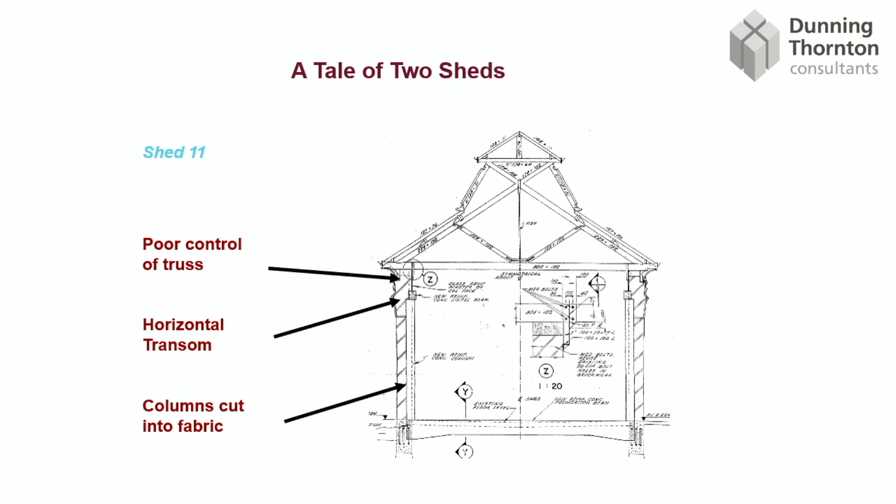And there were some sort of straps put on, but what we found out later, the building was still earthquake prone. It had some problems at the height of where it was joined at the roof, which we've seen in Christchurch is very important. The connection between the walls and the roof is very important. It wasn't a very good project as a precedent, so we decided, okay, well, let's start again.

And when we got to Shed 13, it's a pretty amazing building. It's very structural, it's very heavy. And what Ian said to me at the beginning, he said, like, you walk in, and this is the completed building before everybody moved in. You walk in and you look up at the roof, it's a bit like this building. And, excuse me.

What we engineers tend to like to do is put frames in buildings. And my first reaction to this building was to put frames in the building. And then I thought about that and I reflected on what Ian had told me, which is that you come and you look up. And so if we're putting these new structures across, we're fighting about the direction. So the inspiration was to turn our thinking upside down.

So instead of putting the frame up this way, we turned it up and did all the work in the foundations. And so we put large beams under the floor, and then we cantilevered these columns up, but we didn't put them in the brick. So we put them in separately. We made them out of prestressed concrete, so that's concrete that's got wires that have been stretched and then let go, and so the concrete doesn't crack, it's very compressed, which makes it very stiff.

So it was my way of trying to put a structure in it that was as close as I could get to mimicking the stiffness of the old brick walls. What we did to the brick walls was we post-tensioned them as well, so we cored holes all the way down into the foundations, and we put cables in which we grouted into the foundation and then stretched and clamped them down on top of the brick.

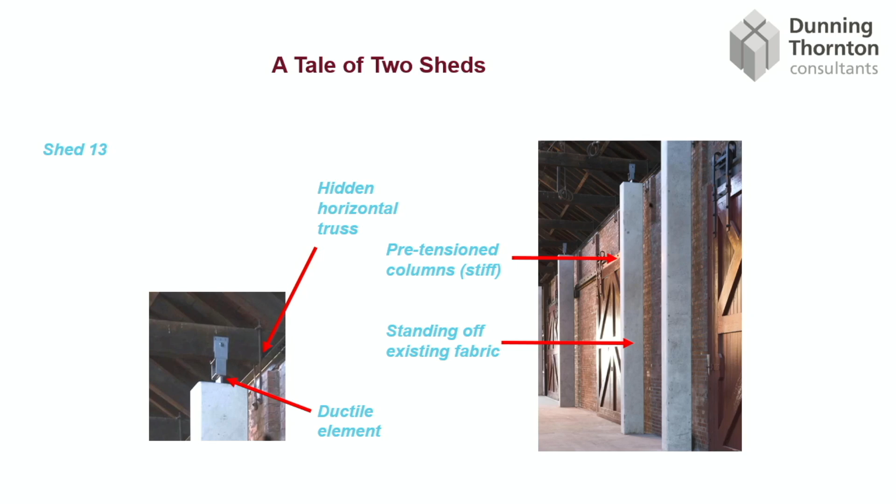So what we needed to do is absorb that earthquake energy, slow it down like the shock absorbers do on your car. It's not just springs, it's the shock absorbers too. So what we were trying to do is let the building rock like it wanted to, make it a bit stronger by post-tensioning it, and then absorb a bit of earthquake energy. So a lot of things going on technically.

But where I think this project came very well together was using the ICOMOS Principles, which is to make what you do as a structural engineer transparent and reversible. So we were putting these new columns that weren't touching the existing. It was obvious what was old and new, and if we find magic ways of strengthening these buildings in decades or generations to come, these could be removed from the building.

So I'm not sure if things need to be removed, but the concept that they could be helps you as an engineer pull them apart and make the legibility between the two items work. So to do that, we had to go up to Otaki and make these very strong, stiff columns in the precast concrete yard. So we were using cheap commercial technologies, if you like, but with a nice finish on the concrete.

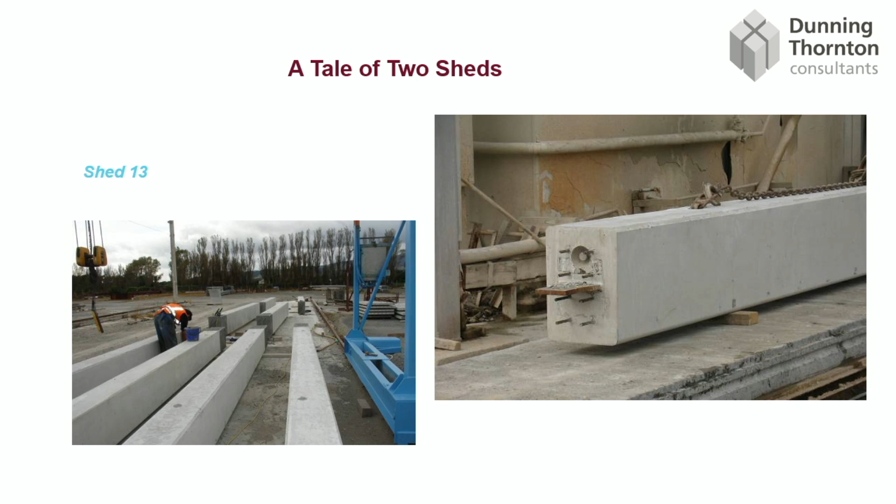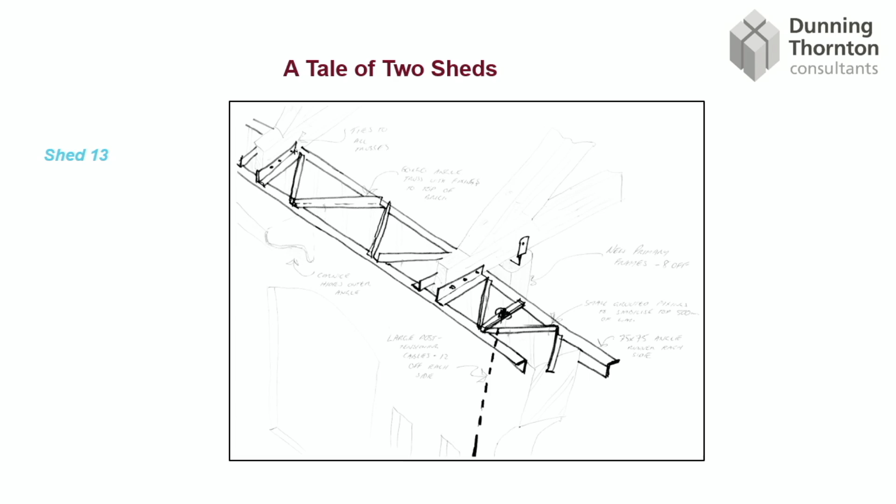Then in terms of hiding it, so we were showing it for the mullions, we then laced the top of the wall together with a steel truss. Because it's got very large cornices on the outside of the building, there was a gap between the cornice and the brick, so we were able to pass along bits of steel and angle and make a truss that capped off all the walls around the perimeter. This is a rough sketch I did in the design meeting trying to explain what I was trying to do. So you can see that running along the tops of the brick walls, there's just a bit of a steel angle.

So that's all laced up, and that means that the columns join up all the way along the walls, and it means that we didn't have to do anything to the roof. All we did is we re-nailed all the timber boards down. We didn't put new structure on the roof because we wanted to leave it in the state that it was, and putting this angle in the right place, finding that location, was a really big part of it.

So really, you can't actually get into this building, which is a bit disappointing because Mojo have it privately. But you can see where all of the interventions are spaced off the brickwork. It's very obvious what's new and what's old, and they're very different architectural gestures, if you like. So I think this is a particularly good job.

Just to reassure you, we then went back and addressed Shed 11 five or six years later, I think, and so we've ended up post-tensioning all that brick down and trying to make the existing strengthening work a bit like what we did here at Shed 13. So we've managed to strengthen that building too, and it's got a similar foyer intervention.

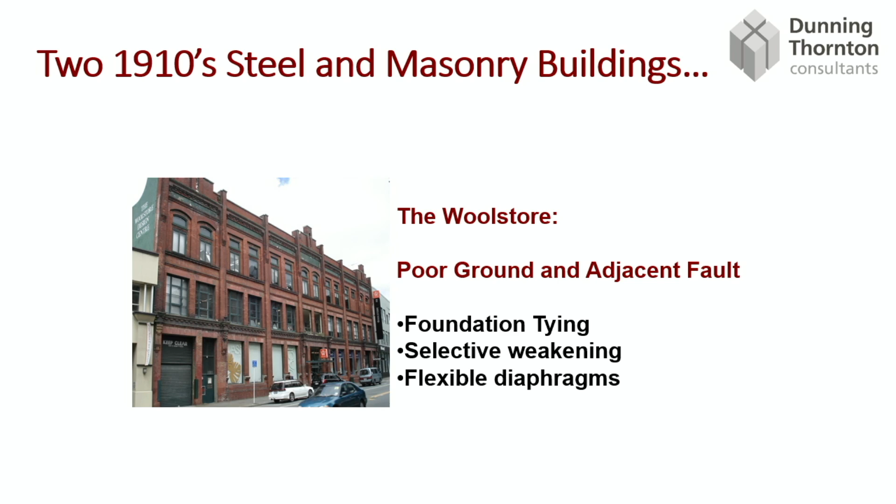Whereas the wool store, when you understand it structurally, is actually a very different building. It's an industrial building, made as a wool store, obviously, for very heavy wool bale loads. So it's a steel frame building, and even though it looks like masonry, the steel frame holds up the whole building and is then clad in masonry. So it looks like a brick building, but it's actually a steel building with a masonry cladding, and that's sort of good and bad because it's built in so strongly around the steel that they tend to fight each other a bit, and that makes it a bit difficult.

So what also made this project a bit difficult is the fault is literally right outside the front door. It's the scarp that comes down when you drive down out of Thorndon onto the quay. So we were really, really concerned about the foundations of this building and what was going on there.

And so what we tried to do with this building is embrace the steel frame, but then what we call selective weakening, which is some little delicate cuts to the masonry to let the building work like the steel frame it already has the strength from. Work with the building's natural strengths, if you like, and just with some small interventions free it up a bit. So I'll go into that in a bit more detail.

So we started, and the client was very brave. They tried to keep the building fully occupied throughout the strengthening, which was probably painful for some of you if you went to visit the shops, and it was a little bit difficult for the tenants. But what it meant is that there was still some life in the building, and it was occupied.

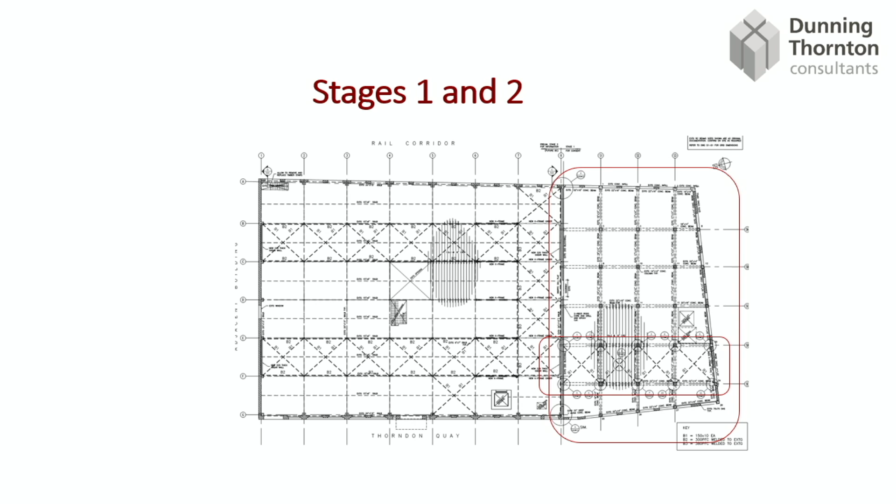And the addition had a concrete basement. In the original part, it just had very large caisson mass concrete footings, probably shoveled in by hand. And so we're really worried about how these would respond when the ground's all moving, with the fault moving and earthquakes and that sort of thing.

So what we did is we dug out the whole basement, we cast a big raft to join everything together, and then we piled and anchored the existing foundations down. So we created new rigid connections through the beach and into the alluvium underneath the old beach that the building was built on. We had some bracing inside the building because the masonry in the facades wasn't strong enough, but we put the bracing inside the building where you don't see it on the elevations.

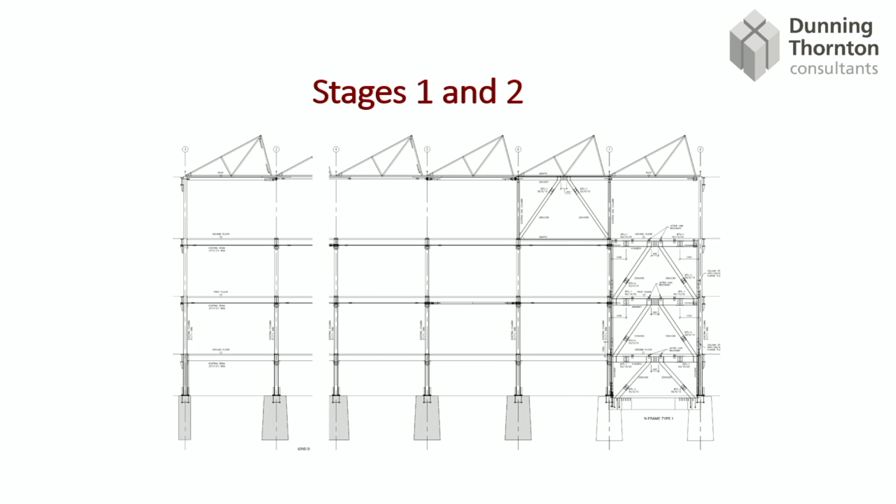So you can see it, there's some K-frames within the building, but you walk under them when you're inside, but the idea was that they were of the same sort of ilk as the existing steel frame. And then in the other direction, we had very stiff boundary walls.

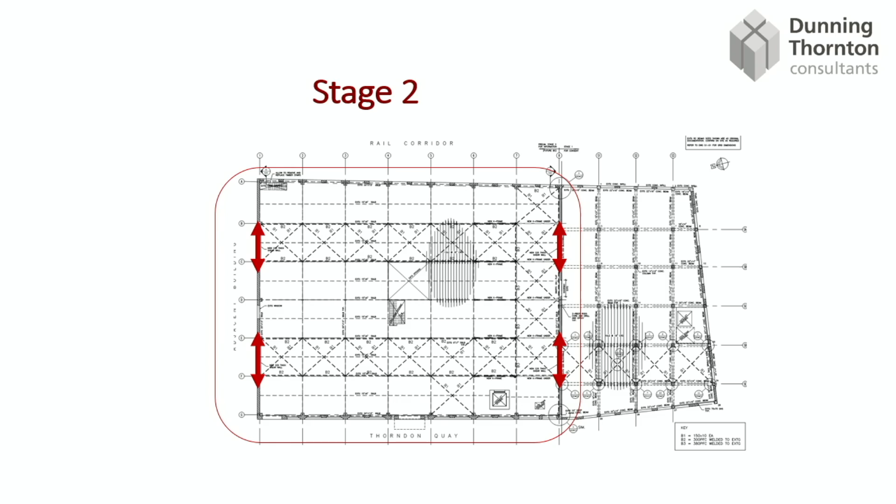And what was interesting about these is they were almost strong enough for the 70% of code that we were strengthening this building to. But what we were worried about is because they were so rigid that they would damage the foundations, because they're so strong that anything that the ground moves causes them to push and pull on the ground each side and potentially cause liquefaction.

So what we ended up doing is we ended up slicing these walls into 6 pieces, so that each piece could move, and so it was more flexible. So this is that selective weakening I'm talking about. So as engineers, we like to control things, so that was our way of getting control back off the building.

So we're slicing the building into pieces, and then we're connecting it up with a new piece of steel that we can measure, and so we know how strong that connection is. So now we know the performance of the building, because we've done something ourselves and we've kind of taken control of it.

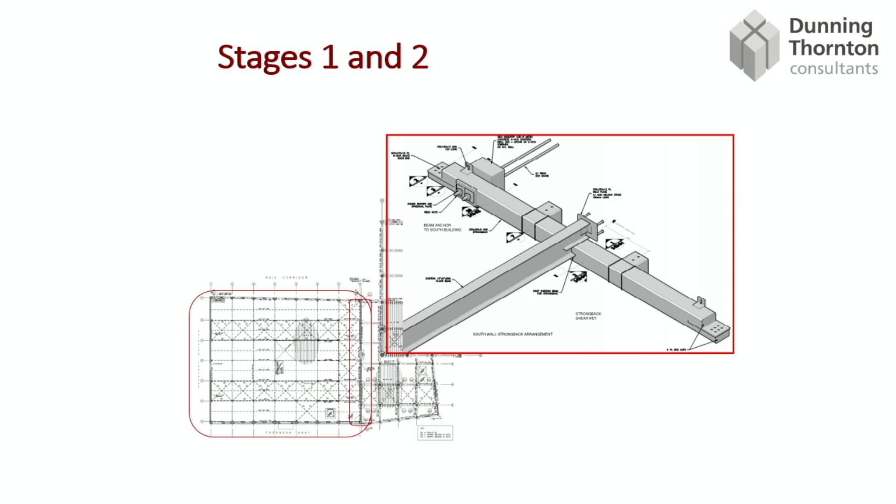And because it was built in 2 stages, we had to try and join these up. The grids didn't line up, and it was all a bit of a mess. So we had these very complicated bits of steel that had to try and hold one building to the next, and at least the floor levels line up, which doesn't always happen with these buildings, and kind of connect it through these panels of the building that were moving in earthquakes. So some really complicated bits of steel, as you can see, to make that happen.

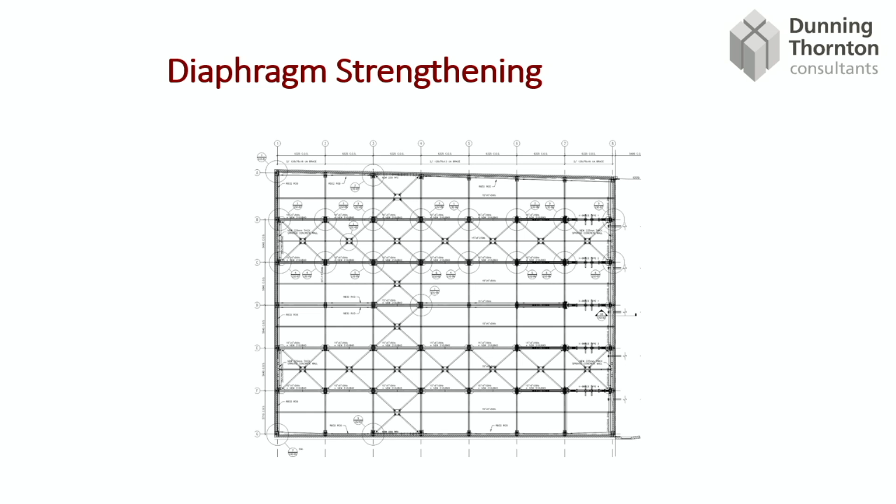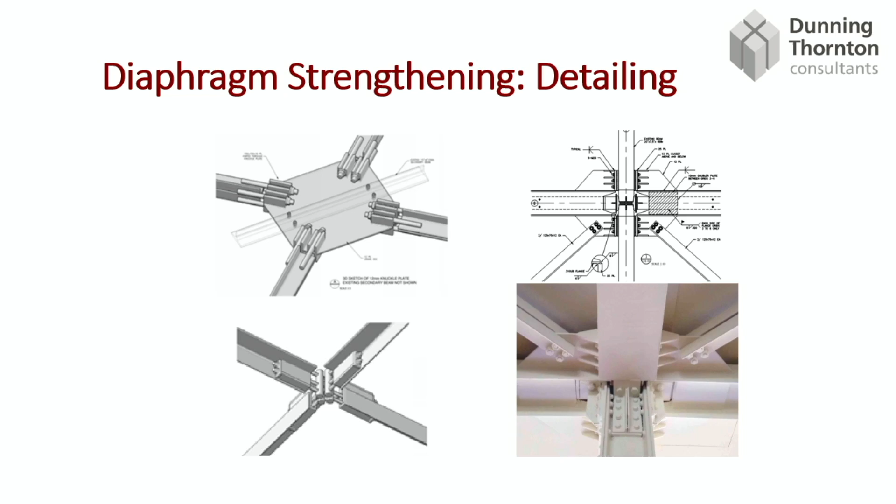So you get this crazy bit of structural modelling where you're trying to predict how the building works. But what it really came down to for us was, let's get a couple of good details that run around the whole building and get a bit of a theme going. So bracing up the floors, what we tried to do is pick up the language of the sort of Victorian detailing of the old steel frame, but it was different because it was new. So we didn't try and use old rivets or anything like that.

So we used new bolts, but we used lots of stiffeners and really engineer-driven details, which you see in the old railway stations and that sort of thing. So we tried to express this in the same way, where instead of just using a bigger bit of plate, we used more smaller bits of plate to try and show how the engineering was happening, and therefore make them more in keeping with the existing building.

And we've had some comments from people looking around saying it's quite in keeping, and I think that's important, that you don't try and mimic exactly what was in the old building, but you do something of the same vibe, the same theme as the original.

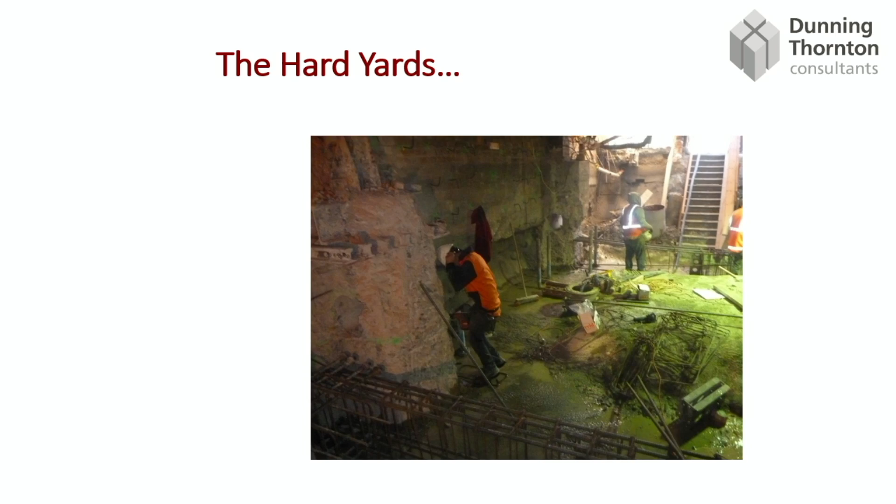Something that always happens in these jobs. This is the blunt end of structural strengthening: digging in under buildings, horrible, hot, wet work, digging around trying to strengthen these foundations. I don't think people quite appreciate the work that's done by some of the contractors to get in and under these buildings to try and make this happen. It's noisy work. It's difficult, but it's essential, and it's often the place where we do the most work to make sure everything's tied together.

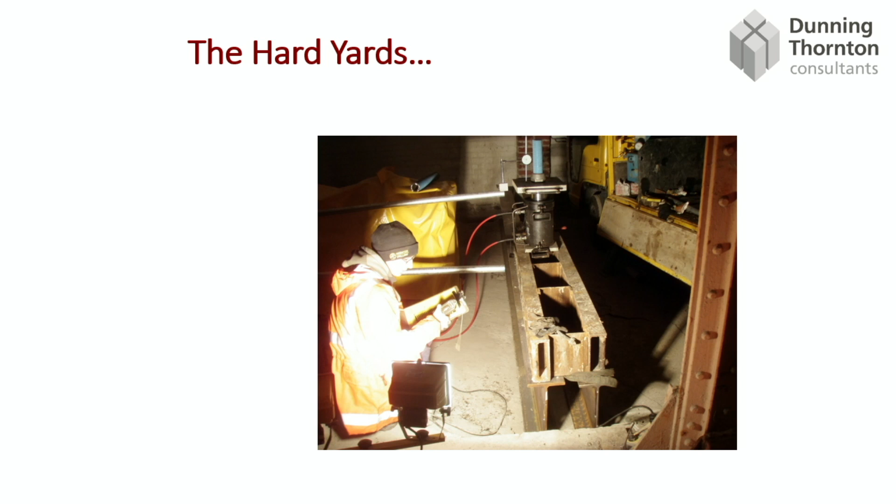And there's lots of metaphors throughout history and religion about having a good foundation. So an important part of the job. Testing the anchors, testing the new connections we made through the beach into the alluvium underneath. Connecting everything up, lots of reinforcing, connecting to the steel frame, both new and old, above.

It's more craftsperson like. That's why it's expensive, unfortunately. But you're trying to match something and mate it up to the existing. And an old building's always got different measurements, and it's always moved a bit. So it's difficult. And one of the achievements was keeping, some of you might have met the cafe owner in the wool store, and she's a very strong personality, and keeping her happy throughout the project was an important project goal.

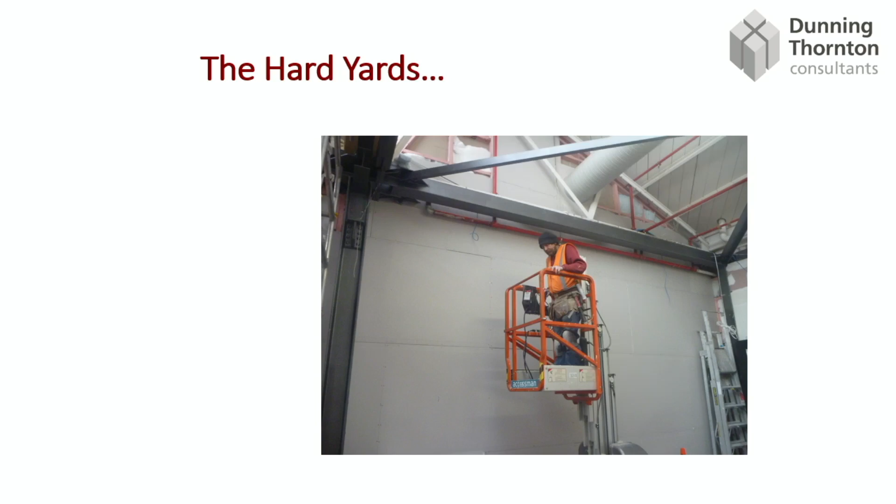So for the wool store, you can see here there's new bracing, but you're seeing the old behind it. Again, it's a little bit like Shed 13. So you're seeing old and new, but the new has some ilk of the original design in it. So that's our way of trying to make it not fight it when you walk around the building.

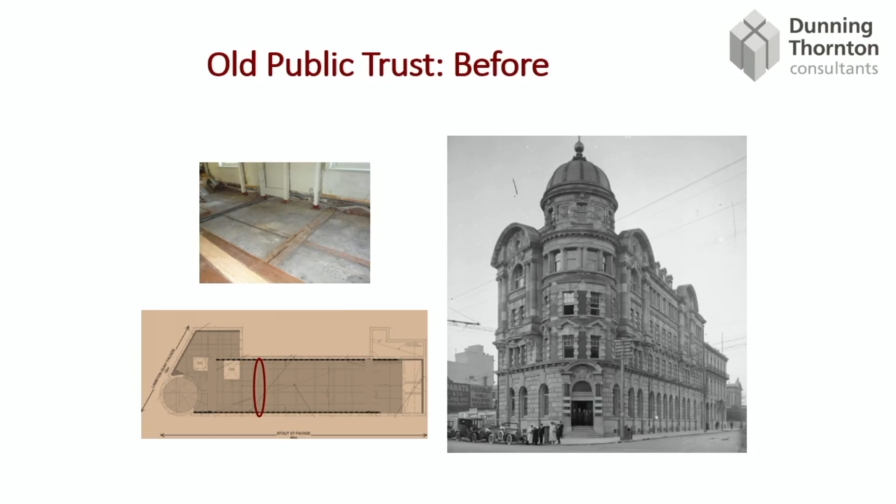So in contrast, the old Public Trust, instead of a steel frame, we've got this masonry frame, but you can see in the photo on the left, those are the girders that hold up the floor. Now, we had a summer student from the architecture school work for us, and she did some research into the history of this building. And what she came up with was that after the earthquakes that Wellington felt, including 42, there were quite a few between when the building was built in 1912 and 1942.

They thought beams were falling off the building when it was shaken by these earthquakes. What was happening is these old girders had plaster around them, and the floors were just cast on each side, and as they moved, they were making bits of plaster drop down. So people thought the beams were falling on their heads. That's what was reported in the paper, but it was actually the connection of the floors each side of the beams that was the problem. This very long building was bananaing in the middle in these earthquakes and breaking all the plaster. So that was a big challenge for us to fix.

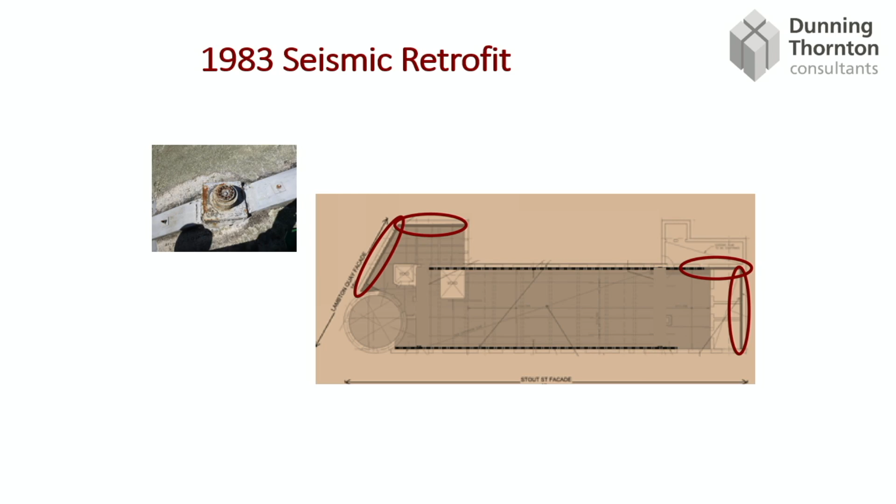In 1983, they realised that the building was not strong, and so they did what was then seen to be the right way of doing seismic strengthening. So they did what we did in Shed 13. They cored down through some of these big pediments and pre-stressed them down, so they did a really good job of clamping that together. And they cast some shear walls where I put the bubbles on there, to try and brace the building along and across.

What we did in the 80s and 90s, and it's even gone on for some other engineers, is rather than work with the existing building, it's like, well, to do my engineering calcs, I can put a new building inside it, and then I'll connect the old building to it. That was often the way it was done in engineering circles, and it's not seen as good practice now. What we try and do is understand the existing building.

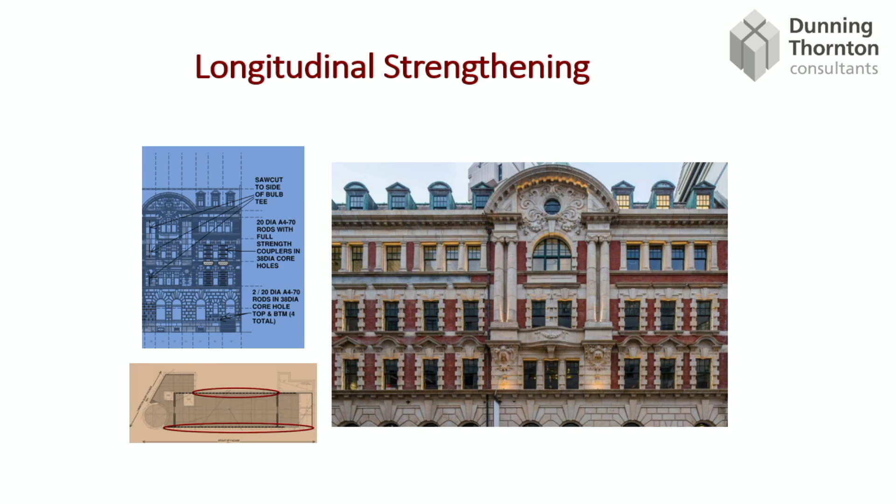And what we did by studying this facade, we used this as part of, in 2014, we issued new guidelines to New Zealand engineers on how to strengthen masonry buildings and how to do all the calculations, and we drew on the research that had been done in North America and Italy especially, to try and improve, especially after Christchurch, how we engineers understand how the masonry is naturally strong.

And what we found with Old Public Trust is the piers and the spandrels of these long facades, the main facades that run along Stout Street, back and front, is that they could almost take the full code loadings, because the piers would rock and then they would come back on themselves, and there was no diagonal cracking. They were very predictable movements in the facade, and so we had this great building that had a lot of strength longitudinally, which didn't really need the shear walls that were added in the 80s, but it still had this

problem across the building. On these facades, some of the piers are really big, and so we did some discrete cuts to make the big pier two smaller piers so that all the piers were even, so that the building all moved in a more uniform way. And we were pretty delicate at that, and you can't even see them from the outside, these extra cuts. They're within the masonry. And then when they redid the mortar joints, we dug out the mortar and we put stainless steel rods in there, so that helps reinforce it so that there's no sliding off of the piers on those joints. So again, really using the strength that's already there.

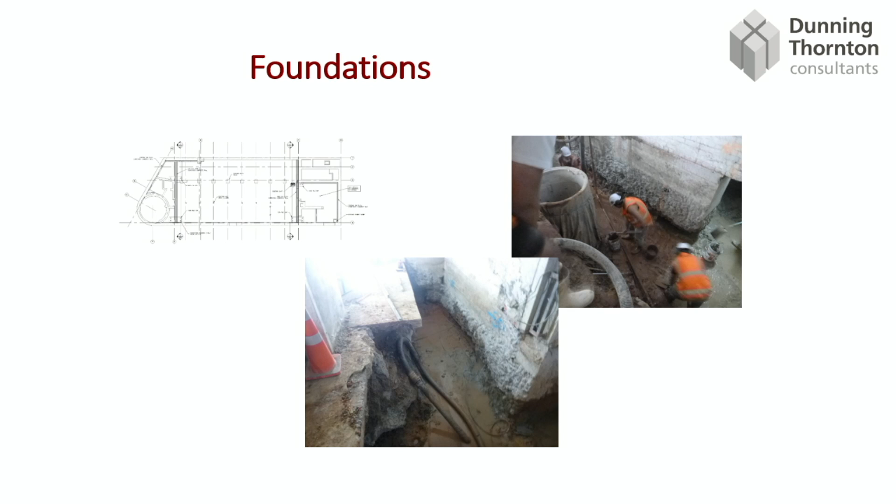Foundations, we've talked about this before, so try and anchor the building down to the good rock that was underneath this. And then across the building, we decided, well, we just needed to do something really, really strong, but doing things that are just strong in an earthquake isn't good enough, because we never know. Every earthquake surprises us. When we have a new earthquake, us engineers learn something. So if you pick a level of strength, the next earthquake could always be stronger. So what we try and do is absorb the earthquake energy, like I said on Shed 13. So we call this ductility.

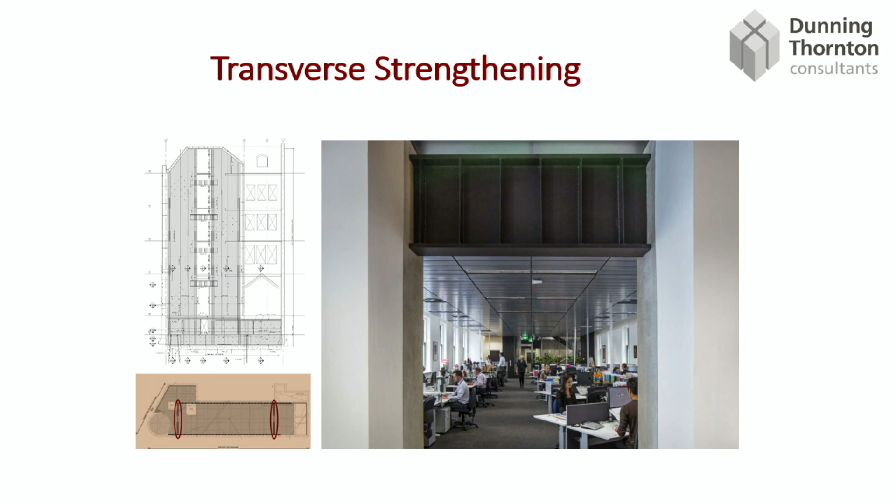So what we did, instead of just making one big rigid shear wall with doorways in it, we made a slot in the shear wall. And this is where you walk through out of the main entrance into the floor plates you can see there in the photo. And that's coupled up by steel beams. So instead of the shear walls being all rigid, what they can do is move, and the steel beam gets bent by the earthquake. And the steel is very ductile. It can go backwards and forwards in the earthquake and use up the earthquake energy. So again, reaching out, trying to get some control over how the building's going to work, but it's still very stiff because you've got these massive walls that are talking to each other through the steel beams.

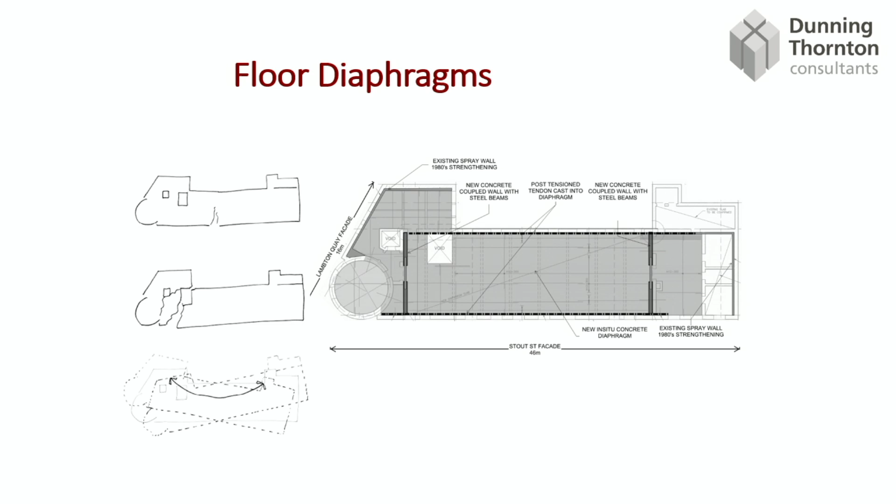So I didn't publish these sketches to the client, who was quite nervous about the building at the time, but the big problem was that the building was twisting around and tearing at its floors. So we had these old steel beams that were in the floors and that we could see at the top, and they were underneath a raised wooden floor.

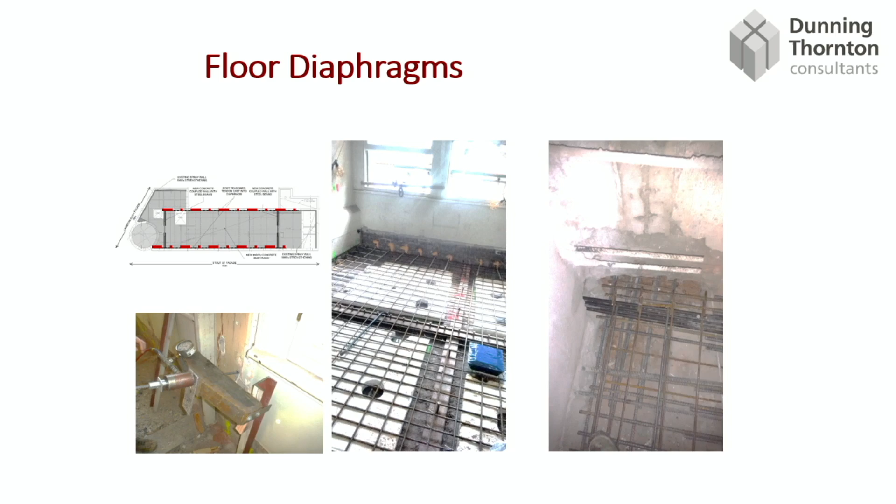Now, Maurice Clark owns this building, and he was doing the strengthening, and he and I had many discussions about what we should do about these floors, because there were some really nice old floorboards within the building, and that sat over the top of this concrete floor in the steel beams, and Maurice was very much like, well, we've got to put the wooden floor back, and I said, yeah, but the problem with that is we need to put all this bracing in, so where do we put it?

Do we put it underneath where you're going to see it if you look up? Could we pull up the wooden floor and put it down and then put the wooden floor back? But then once we investigated the building, we found that in the 80s, when it had been refit, there was only about 5% of the wooden floor left. Most of it had been taken up, reused somewhere else, and there was particle board everywhere. So that shortened the argument quite a lot.

So we basically pulled up all the wooden floors, and we used that thickness of the old wooden floor to recast concrete. Now, we normally don't put that much concrete in an old building because we're making it heavier, we're making it worse, but we'd done our studies in the long direction, we knew we had extra strength in that direction. And what it also would do would make the old steel beams sag.

So what we did is we propped those beams up, and we put things like bolts that are welded to the steel beams. And when we recast the concrete and then depropped, the beams would act with the concrete together. So we made the beams stronger by making this connection to the new floor diaphragm that we'd put in. So by these new strips of concrete, we were able to connect our shear walls and tie everything in very well.

And on the outside, to make this concrete stiff enough, we also used some cables, some post-tensioning again, because we want to stop the concrete from cracking, because cracked concrete can be like 4 times as flexible as uncracked concrete. So we wanted to squeeze it up and keep it stiff so that it worked with the old masonry.

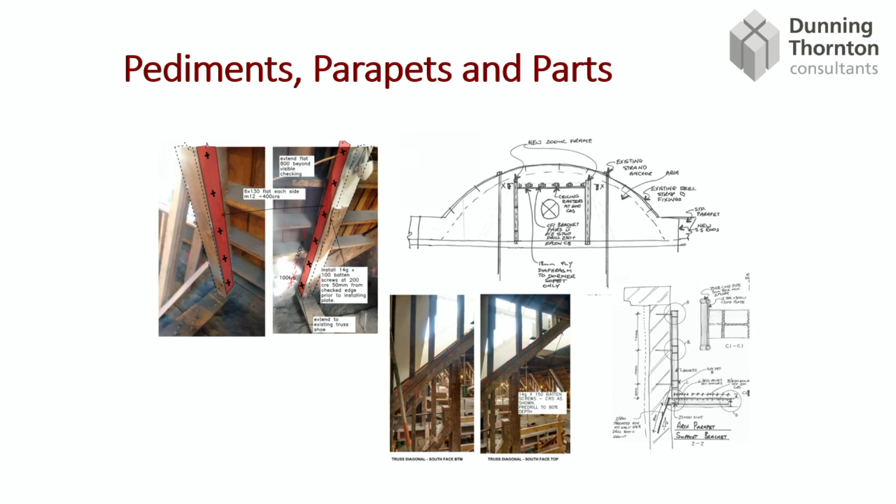We did further strengthening to the parapets because under the new codes, the loads were higher than they used in the 80s, connected in all the really difficult parts around these mansard roofs and stuff, and we see really often with the heritage buildings, it's the little bits that are the tricky bits, and they take these sort of sketches that we do. Some of my staff who really love doing this kind of work, they end up with dozens of these sketches at the end, trying to communicate to the contractor how to fit something in there.

It contrasts so differently from when you draw something new, and now you can just model it in 3D and draw up all your joints in full 3D. It doesn't really work with an existing building because you don't know where things are until you actually open it up, and it can be like 3/4 of the way through the construction project before you can even see what you're really dealing with, and so you've got to react very quickly and then try and keep knitting it all together.

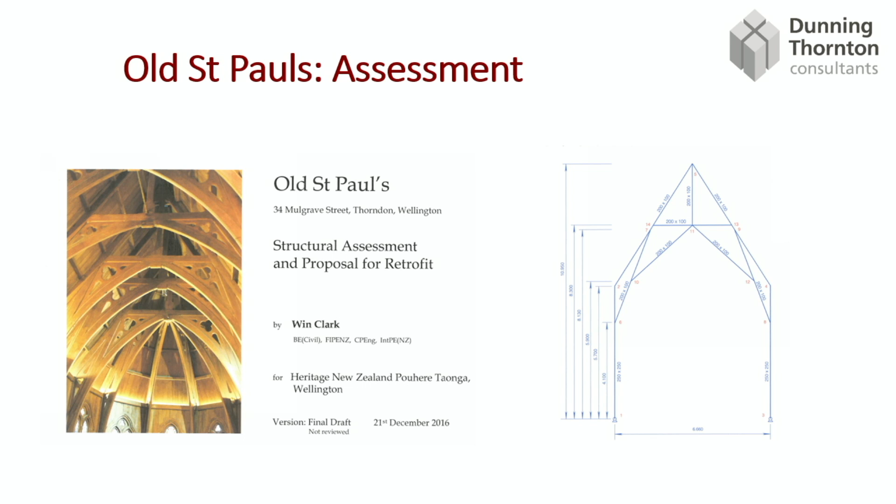Right, so going from masonry to something a bit lighter. Old St Paul's. We got involved; Win Clark, who's done the assessment on this building, very passionate about heritage, had done some assessment on Old St Paul's, and this is one of his models from his report that he'd finished just at the end of 2016, just when the Kaikoura earthquake happened.

And he was saying the building naturally has a lot of strength, but part of the thing with the old timber details is that they were mostly mortise and tenon, and so they were notched in, and so the building was potentially very strong, but what would happen is these tongues that were slotted into the wood would withdraw in the earthquakes, and so that loosening was possibly compromising the strength.

So the building had an ability to be strengthened to 90% of code with the structure that was there, but all the connections weren't up to that, and so he needed an engineer to go through and work out how to strengthen all these connections, and that was the job we took up. But then Kaikoura happened, and those of you who went into the church after the earthquake, you might have noticed a whole lot of truck straps around holding the building together.

I was actually supposed to be off on holiday with my family, and I ended up staying another 2 days to do this strapping design, and then I flew up and joined them later for I think it was Christmas that time.

So what we did is we bound it together with straps, and that's why the building, by keeping these joints shut, still had all the strength. But then the job was how to do that in a permanent fashion.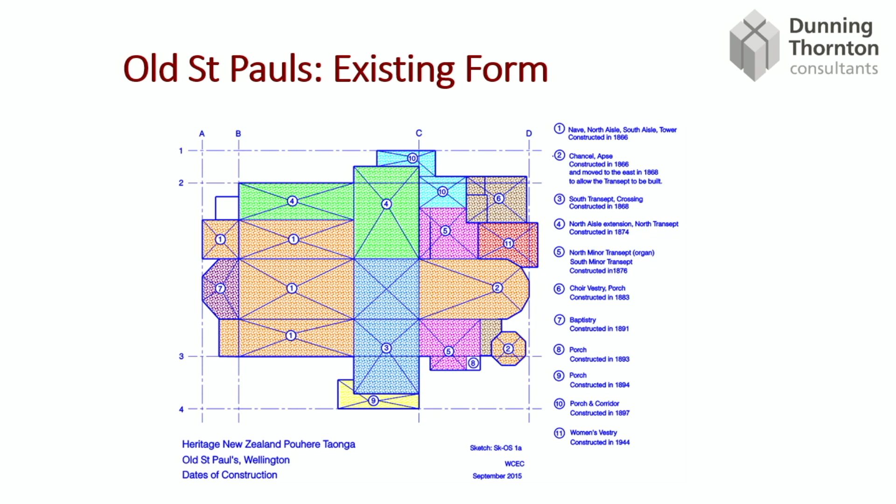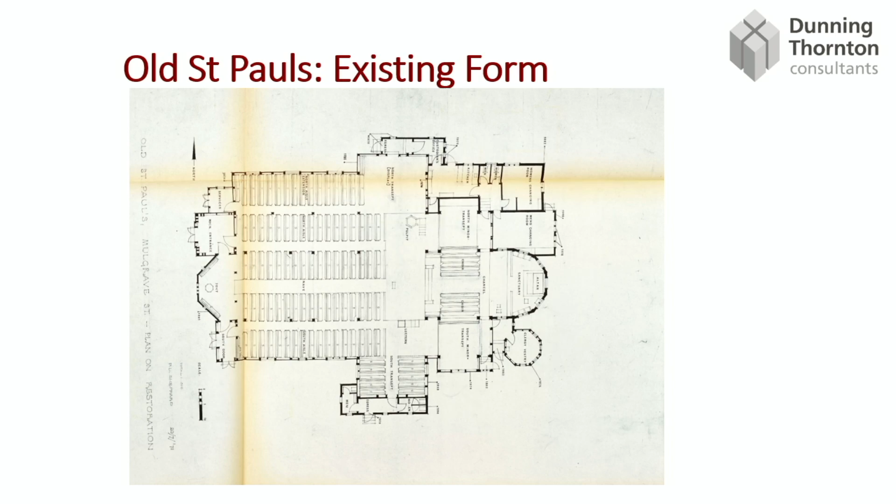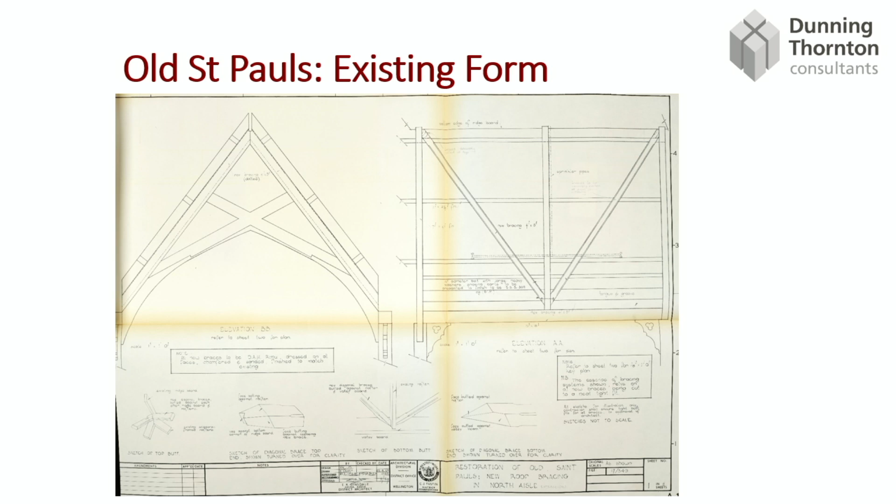So they were trying to put back all the braces that were there. Because there's quite a few diagonals in the building, they were assuming that they were all good enough, and there were these great drawings where they're dimensioning how they have to notch the end of each brace and fit it in and do all the sort of stuff that you have to do with these wooden buildings to fit them together.

And then what became slightly the bane of our life were the transepts of the building, where they had these timber frames where they'd put different braces in, but because they were such an amalgamation of different years, nothing really lined up. The northwestern wall at the end of the transept that faces the Tinakori Hill had been moving around quite a lot. So they almost rebuilt that, but they rebuilt it in the old form, and they just added a couple of diagonal braces to stop it moving around.

And that was actually the worst thing for us, because what we're trying to do when we strengthen this building is to hold the joints shut but not stiffen the building up, because what keeps this building strong is the fact that it can be flexible. It's timber, it can move, and all the joints squeak, and that squeaking of timber sounds facetious, but that's using up the earthquake energy. We just have to have that little bit of give, all that little friction spread out through the building. That's what makes it strong. So we've got to not make it worse by over stiffening the building.

So that's quite a challenge for us, because you're talking about how old materials work, and the calculations are plus or minus 2 or 3 times, not the kind of 10% accuracy we're used to, and so you've got to get your head around that.

So the concept was to tie the main frames across the building. There was a lot of discussion with Russell Murray, who was the heritage architect on this. We had the truss ties across while it was being used after Kaikoura, and there was a question, could they be removed again, so that when you looked down, there wasn't any new structure across there. And we looked at it, and it's like, no, this building will always get wider when it shakes if we don't have that ability to tie it.

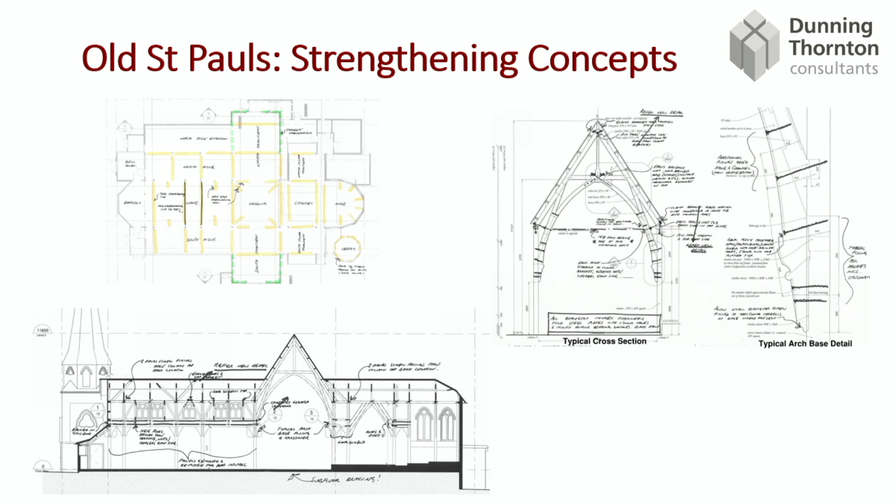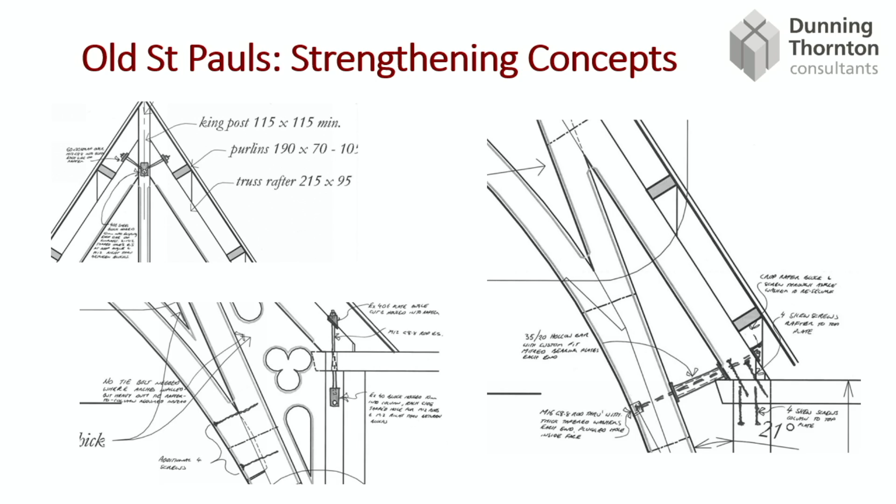So the concept was, in the old timber, we didn't want to tighten it too much, so we put blocks in that were let into the wood, and we put clamps in, but they weren't too tight, and so we're notching and we're pinning and we're using screws. Now, these aren't the screws that you're normally used to that are about this long. These are screws that are this long, and they're up to 10 millimetres diameter, and they're made in Germany or Austria, and they're very high tech.

They cost about 100 times what the little screw does, but these are the new tools that we have. And by looking at where the thread is on the screw, having sometimes gaps in the thread, and looking how much you squeeze the joint before you put the screw in, that's where we can start to get this control over letting the joints be flexible but strong.

And so what we're trying to do is this kind of, you can see the sort of blocks that were hidden in behind and then bolted, then clamped through, so that you're trying to think of the builder trying to reach in and fit it, and you're also trying to think of, when you're looking up at it, how is it going to look visually.

Continuing my foundations theme, this is a bit more like people are used to under their houses. We had to go and brace the subfloor, so it's the same as you see braces under your timber houses, except that they're about 2 or 3 times as big, and so we went through and did that everywhere. Bit difficult because there was a whole lot of asbestos lagging from previous services there, so that all had to be cleaned out before we could even go under there to inspect it all.

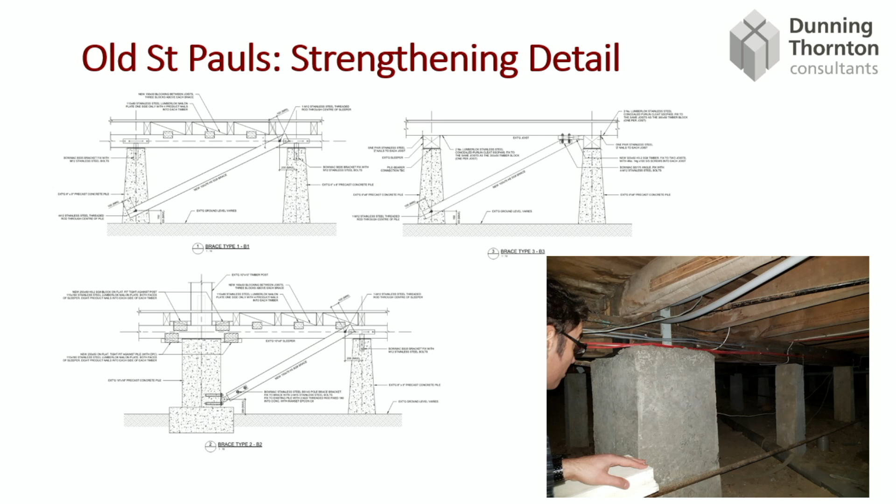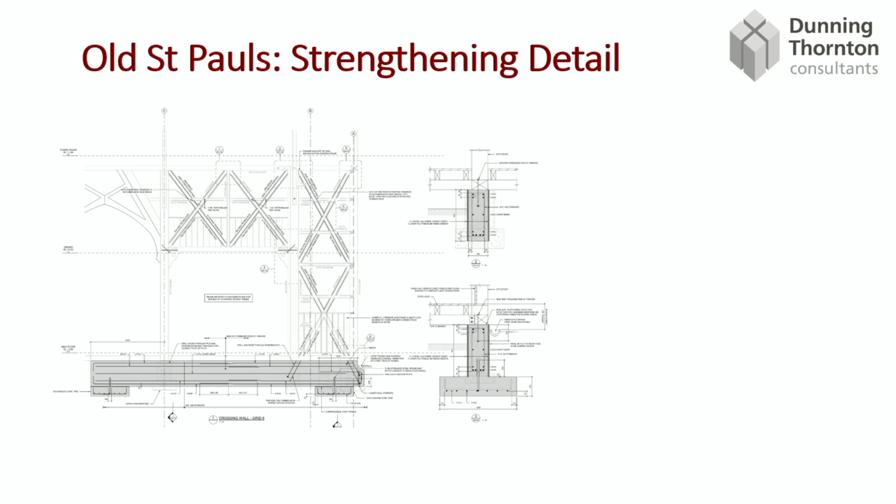We put new foundations under the transept, so what we decided is we would make the wood move a bit, but if the wood ever got overloaded, we put in a foundation beam that was only just heavy enough so that if the earthquake was bigger than we expected, the building would lift the foundation beam.

So therefore we're getting that control back, so that instead of the wood upstairs breaking, it would always lift the beam. So there's a little bit of control for us there, in case the shaking was ever bigger than we predicted. So we created these sort of pads underneath the footings and a beam that sat on top so that it could rock around.

And then with the braces, we're running rods. You might have gone and looked at these up close in the last couple of years, so we ran rods in parallel to the timbers, but we ran it about halfway across the wood. So when you look at the timber, you're still seeing the edges of it, but there's a rod sitting there just off it.

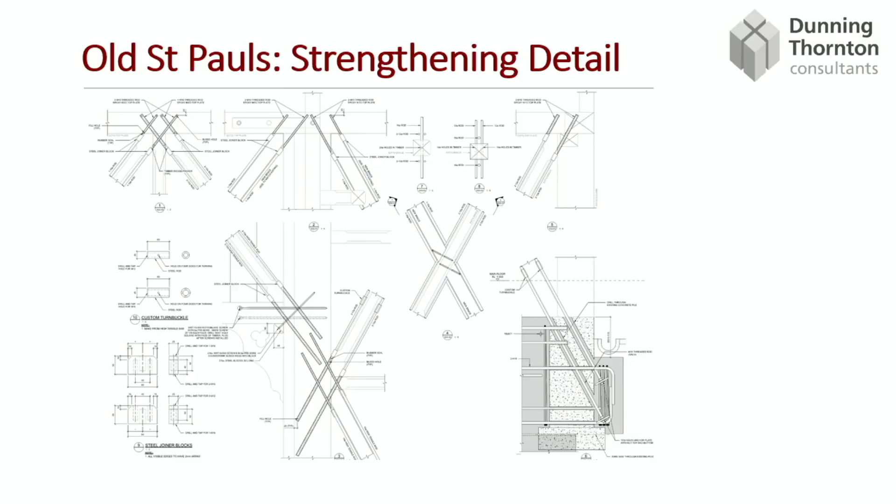And so those rods are only there finger tight. Some of them have epoxy fixings, some of them have fancy screw fixings at the end, but they can stretch a little bit. So again, letting the joints open and have a bit of give to the steel. So the building still tries to move how it always did, but then is caught by this reinforcement we've added.

And then a lot of these panels were then taken off on site, and nothing ever lined up. It was worse than we thought, and poor old Matt from our office, changing details, reworking how we could route stuff up, putting wedges in to line things up, and Tim from Maycroft, who sadly passed away about a year after this was finished.

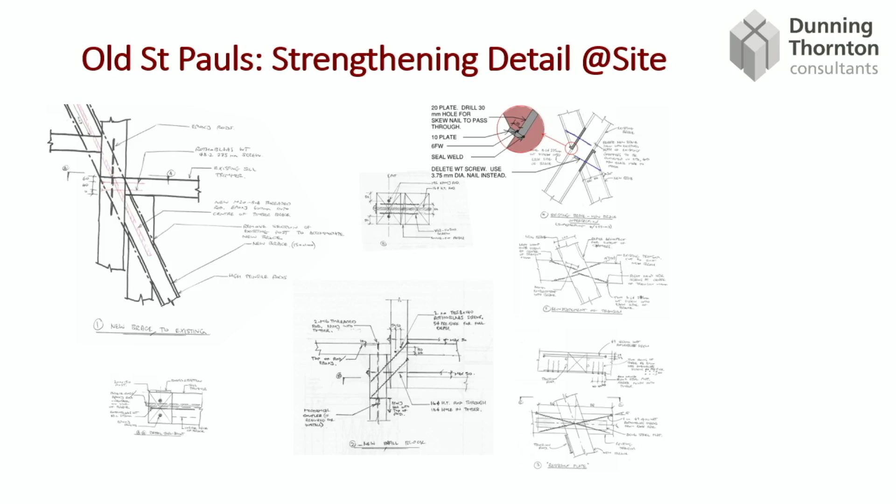These guys were so into the carpentry. They had young apprentices who were learning this stuff, and on this building you had to think 3 times and then only put 1 screw in instead of just working hard. Once they got the bug of that, they were loving it, because of the beautiful old timbers, all beautifully seasoned, and the vibe and the motivation amongst the workforce was really great, and it made it a good project.

So this is what we ended up with at the end. So you're seeing the rods, you're seeing the timber, you're not hiding it, but we felt that this would give the most resilience for the least visual impact, and complicated little blocks with fixings and ties around that.

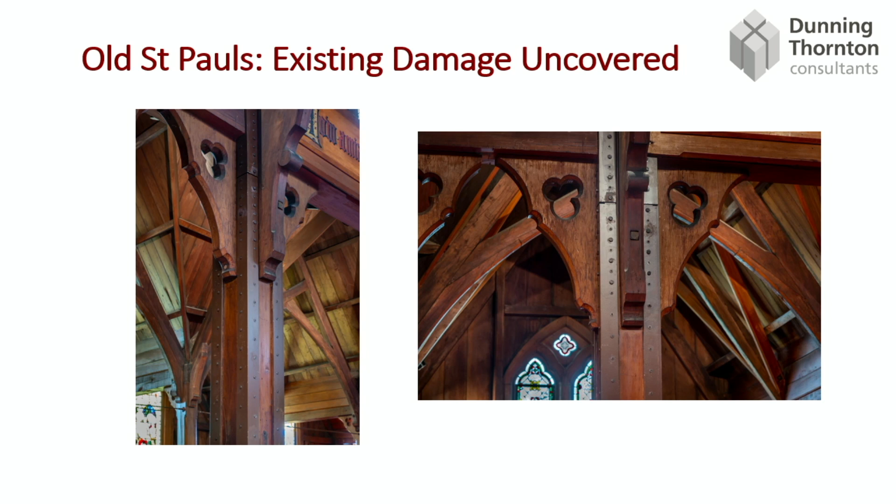It's quite interesting. We could see one of the columns had quite a kink to it, and behind where the clerestory panels were, there's a whole lot of decorative panels just below the windows. So we suspected one of the columns was already broken, and we came up with a detail to sort of splint it. And then when we took the panels off, we found another column on the other side had broken too. So we think both of these columns broke in Kaikoura with the movement.

So when the building had been moved, more chiselling out and notching of the beams had happened at the clerestory, and so the timber was weakened. So these columns were actually snapped in Kaikoura. So the damage was worse than we thought, but luckily we'd sort of strapped the building together in the interim.

So these are the final details. It takes a lot of drafting to get everything lining up, the blocks, everything at right angles, blocks of steel with threaded rods, like your old Victorian machinist kind of stuff. You get back to that sort of thing to get these details working. I really like that sort of thing. You've got to get the bug to get these working.

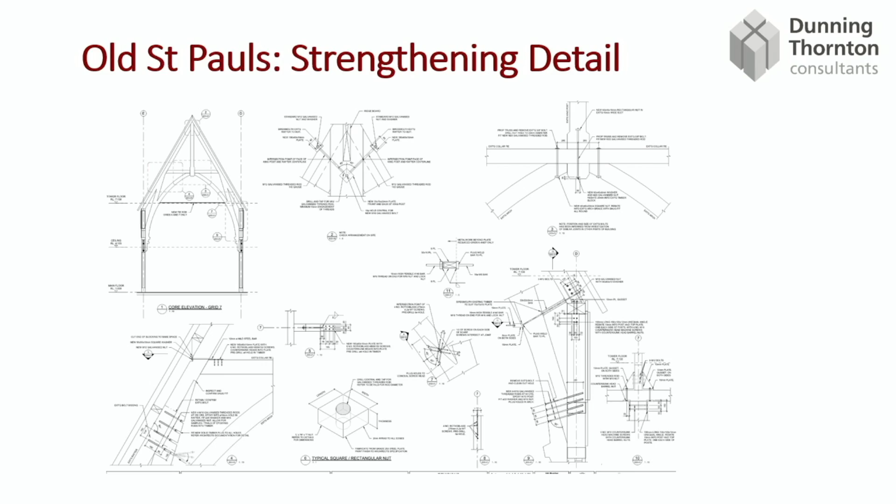And so we think that in the end, all you're seeing is a few rods flying across the space. My partner's actually a photographer, used to photograph in the church quite a bit. So the idea is that you can still get the kind of shot that everybody takes in a wedding, and you only just lightly see two high tensile steel rods flying in above your head in the most important position, and there's another one back behind you above the entranceway. And then over in the west aisle, we've got another extra tie along there, because that had become a bit loose in the earthquake again.

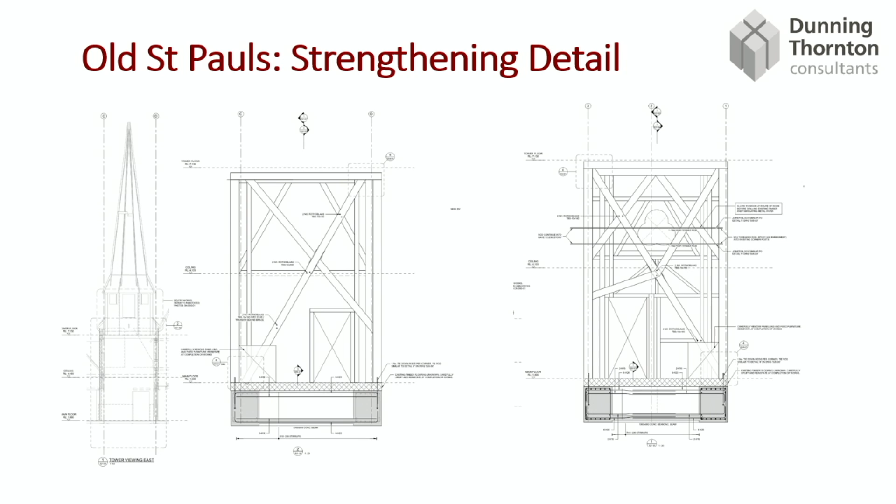The bell tower was tricky. Tall, slender, wants to rock. So rather than trying to brace it, we said, okay, let's just tie it all together and let it rock. So we put a foundation down that was heavy enough to absorb enough earthquake energy, and then we tied all the feet of all these braces together with this ring frame, you can see the frame we mocked up next to it, that is just underneath your feet when you walk in, and that grabs hold of all the braces and connects it to the foundation.

So the tower still rocks like it used to, and that absorbs a bit of earthquake energy. So we're following all the old lines of how the building naturally worked, and then just augmenting it where the forces all concentrate, and therefore we've got to use new screws, high tensile steel and stuff to do a lot of work in a very small place.

So I thought that segued quite nicely into this building, because I'd never seen the drawings from this building until Nick sent them to me. And I got really excited when I saw them because blocks, pins through, tie rods, this was done in this building in 1960, 61. The detail here is amazing. It's clamping all this wood together, and just by gently holding it in place, it just can't displace structurally.

What you probably can't see very well is right up near the top, there's some square cutouts in the wood, and there's some bits of steel that are fed through. You can see it in behind here. And so this is the stuff we were doing in Old St Pauls, and what we're doing in buildings like Nelson Airport, where we're using these high tensile modern wood technologies. And this was being done almost 60 years ago by a master. So I find that particularly exciting.

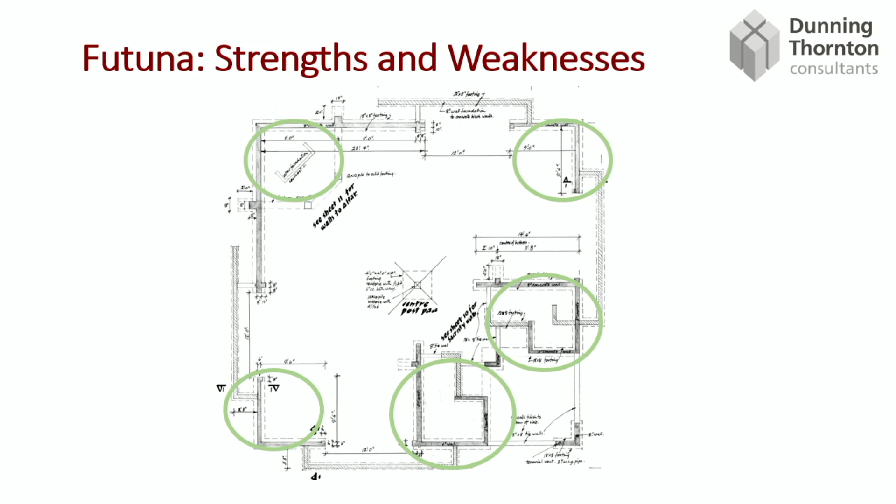And the drawings look like the sketches my engineers have to do to pull these buildings off. They're hand sketches, with more views than you'd normally expect, to really be able to describe the shape of them. So what I thought I'd talk about today: Clark's done an assessment of this building, and it doesn't need strengthening, but what if it did? What are the strengths and weaknesses of this? What would we do as a group if we had to strengthen this building?

Now, green's good, right? So the building has strong corners, these are reinforced concrete walls. And this post is great because it holds the whole weight of the building. You could almost pull all these walls out and the roof would still stay there. We saw that in Christchurch in some of the masonry, especially stone masonry buildings, where the roof would be left flying out there even if the masonry collapsed. So you've got this naturally strong roof form with really good details in it.

But what's tricky with this building is you've got very slender members, and it's coming up on top of this very heavy wall, so you've got this light thing that wants to move around a lot, and you've got these heavy walls that want to move around at the top there. So all of the tension in this building in an earthquake is at that line where the top of the walls and the roof meet.

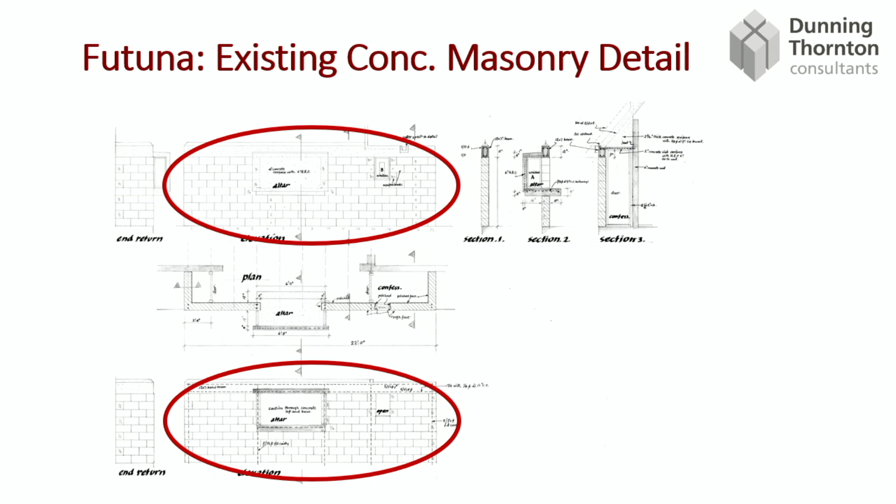And then just to make it a bit more complicated, where there's these large walls, they're all reinforced concrete. But some of the walls on the outside are concrete block masonry, and usually it's filled up with grout, but with the age of this building, only very occasional cells within the concrete masonry are filled, and we've seen in Christchurch this is a very brittle material. They're hollow bits of concrete, and as soon as they crack, they tend to fall apart.

And so it's really important for this building that the strong bits of concrete look after the unfilled concrete masonry, so that it's not damaged, so it doesn't move too much. So, oops.

And what I thought was really cool was that when you look at a lot of the damage in Christchurch and Kaikoura to church structures, these large walls in the traditional buildings often have rose windows and that sort of thing in there. Those are always the weakest part. So when you put the windows in, you're weakening the most loaded part of the building, but what John Scott did here is on the outside of this wall is a cross, and he's put the strong piece of structure there on the back of the wall, and it's stiffening this whole panel and joining it to the sides.

It's interesting because this was done at the same time as the Nelson Cathedral, and the 60s addition to the Nelson Cathedral is actually weaker than the original part because of the same problem, but obviously one architect at the time nailed it and one of them didn't.

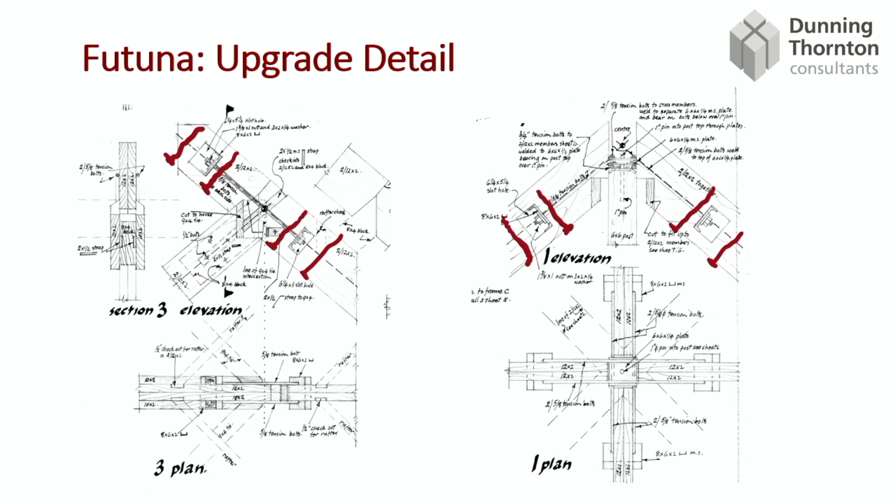So what would we do nowadays? The timber, I think we can just bring our new timber technologies to bear. So we can use these fancy screws. Where there might be splitting, because timber likes to split along the grain, we can actually just pin that very carefully together, and that can provide a huge amount more resilience.

So like we use reinforcement in concrete, we can now use these very technical screws to reinforce wood, so that it doesn't just have strength in one direction along the grain, it has strength across the grain. And this is very easy to do because with a screw you hardly see it. So you can pin the building together and there's no sign that you've been there. So that's the hide it part.

But with the unfilled masonry, the first engineering thing that I'd react to is, well, we've got this problem with the hollow masonry, can we just fill it? Can we fill it full of grout? But then we're changing the nature of the building. It's probably making it even more thermally conductive to the outside. We might make ourselves a moisture problem, have efflorescence, all that sort of thing. So maybe we're disrupting how the building was too much by doing that.

So really what we've got to do is connect, we've got to make sure those other bits of masonry are joined back to the concrete walls that support them. So I think that if we were going to intervene in this building, it would be on the outside, holding the outer roof to the inner roof, and that could be done pretty subtly because it's not really affected in this main view that we're looking at here.

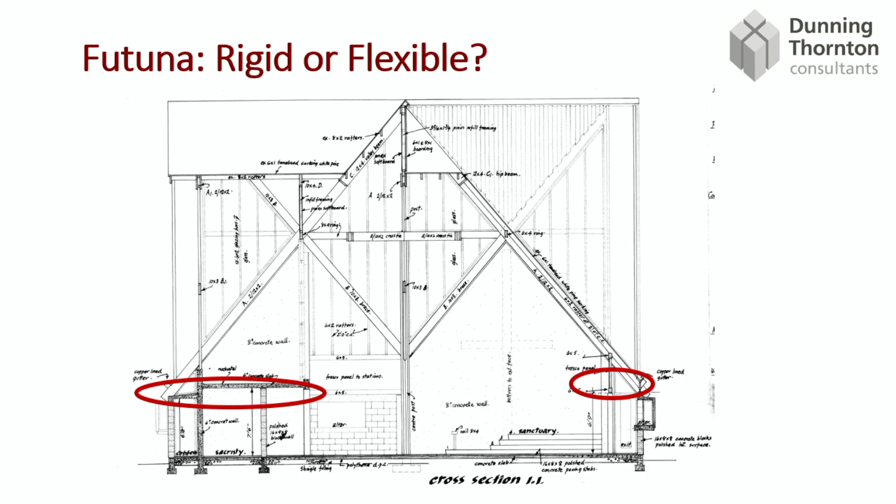But what would be tricky is where these walls are, so we've got a corner that's naturally strong, but we've got this little buttress here, so this wall can want to move around quite a bit. So there's lots of ways you could approach that. We could do what we did at Shed 13, we could put a new buttress on the inside and have it separate, or we could put a new buttress on the outside. But then are we disrupting the flow of the building, the sort of nice minimal lines of it?

Unfortunately, these buttresses don't have huge foundations underneath them. So the first thing we'd want to do is make a foundation. Now, obviously, the floor in this building is beautiful, but we can go outside. So it's about looking for places to do it. So I think what I would do in this building would be to strengthen the foundation pads, and then I'd probably try and clamp those buttresses down a bit more so that they were stiffer and they didn't move so much at the top.

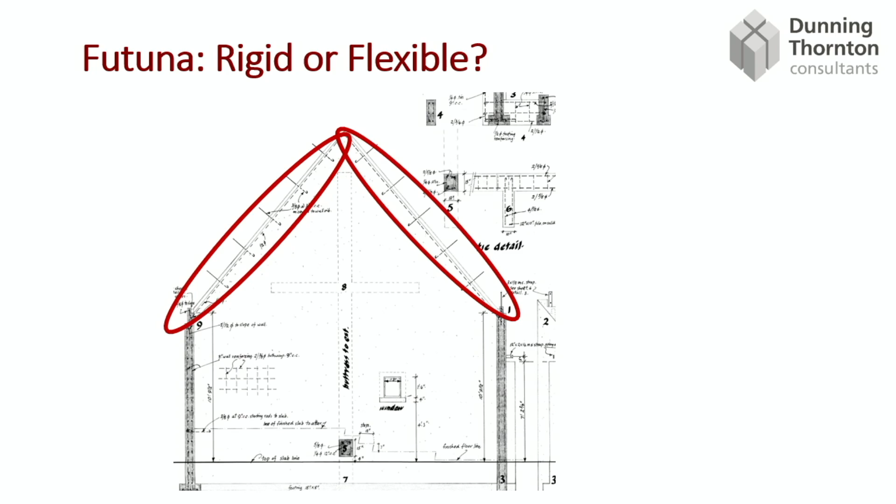Then, really important, we want to make sure that the timber and the masonry stay connected in the earthquake. Now, traditionally with those commercial buildings I showed you, we were spending a lot of time joining the floors onto the walls and making sure the walls weren't falling out. Now, with churches, an engineer's instinct in doing that isn't necessarily the right thing, because a church sits on the ground and then reaches up, and trying to brace the tops of these walls and take all the loads up into this roof and then bring them down again, the loads have got to go a long way, and you have to strengthen all of these wood panellings, all the sarking. We have to connect it.

Hugh Tennent, an architect I work with quite a bit, was working on another of these ancient projects, and they were talking about doing the roof diaphragm and putting extra plywood on it. And I gave the analogy, it's like trying to grab a building like this by the hair and try and hold it together. It's not right. So what you've got to do is appreciate where the strength of this building is, which is just its connection to the ground. So you've got to connect it to the ground and then reach up and just try and pin the tops of the walls so that they don't become dislodged, but we're not trying to brace them. So we've got to let the wood move at the top with the concrete walls and not become dislodged, if that makes sense.

Yeah, so last slide. So I guess as an engineer, I spent, what did I work out the other day? It was like 5 or 6 lectures total in my engineering training at university. Design is not taught at our engineering schools. So us engineers as a profession are trying to wrestle with how to do good seismic strengthening. Now we get a lot of help from our architects, but the architects are not taught the engineering that goes in with strengthening these buildings. So we're all trying to discover this a bit more and trying to do a better job.